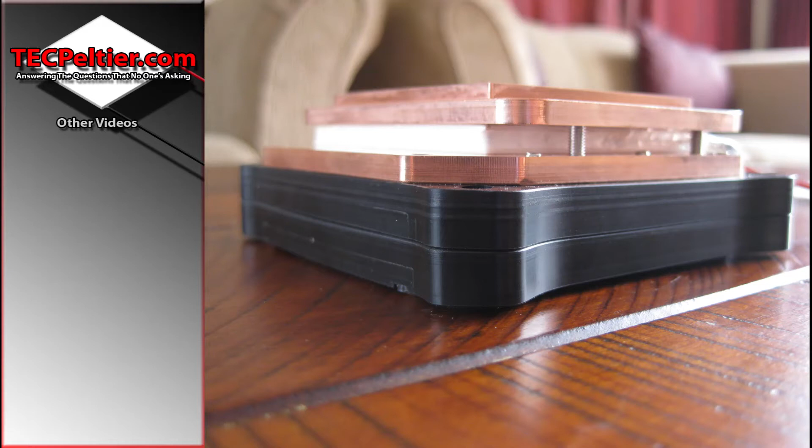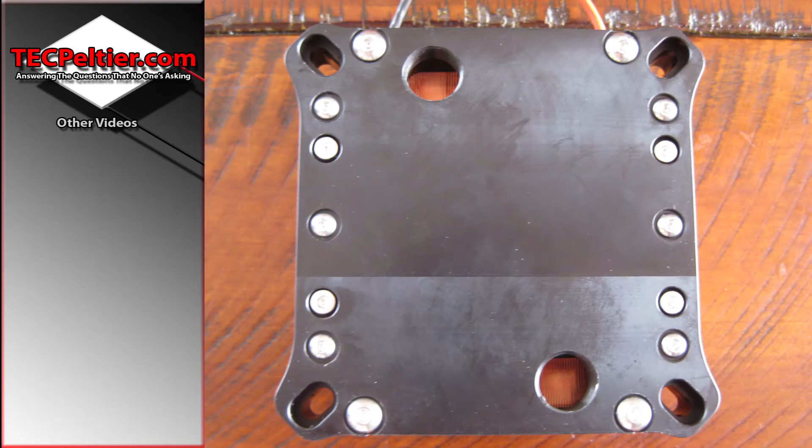Currently I'm working my way through all the water blocks I've made in the past. Now I do recommend that before you watch this movie, I'm not sure I'd really call this a movie, a video, you should probably watch the one prior to it, since we're going to be doing a bit of comparative improvements from the previous one.

So from the last one, this has been improved significantly. One of the ways I did that was to simply make it bigger. It is longer and wider. For cost savings reasons, in the last block I made the water channels, the total width of that, not that much wider than the TEC itself, narrower being cheaper, less copper.

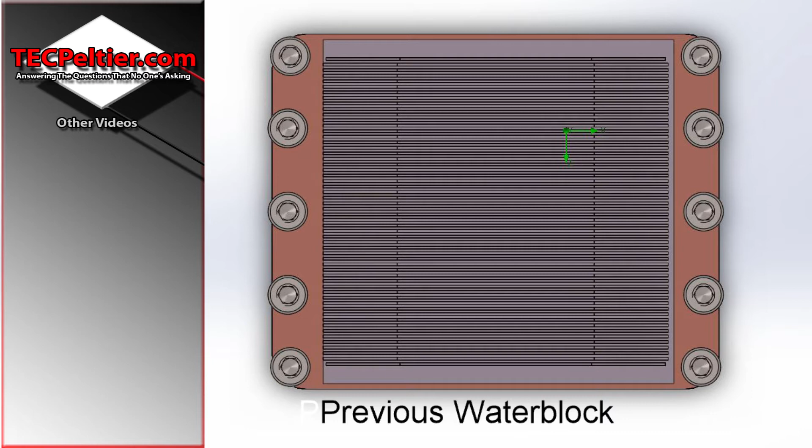But once you add in the space for all the bolts and the space for the seal, the actual slots for doing the cooling were actually not covering the entire TEC. So I made this block much wider, which meant the slots are definitely covering the entire surface of the TEC. And I made the block longer, which enabled me to move the end tanks further away. And this enabled me to mill the slots deeper at the ends of the block.

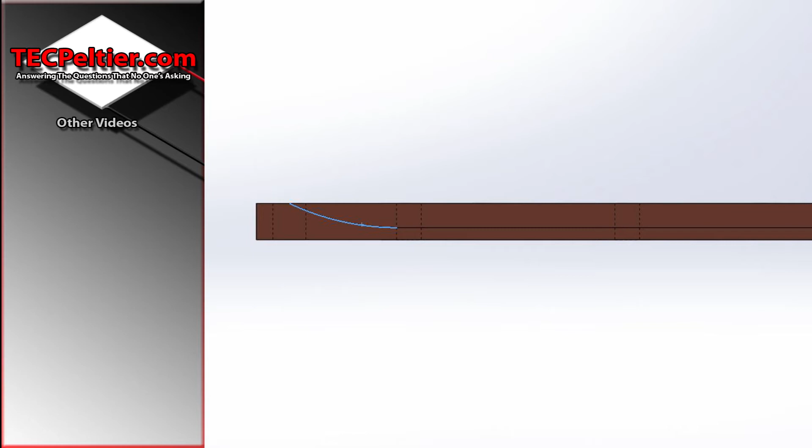This is because it's cut with a slitting saw, and a slitting saw is about 60 mil in diameter. Now, when you try and mill up to a wall, you can't get all the way into the corner because of the curvature of the blade. So as I made the block longer, it's able to mill the full depth further.

Now, some of you might say, why don't you just not have the end and just mill it the entire length of the block? That's definitely possible, but in reality it didn't work for me. If I just didn't have the surrounding thick block of copper, that would have meant that the base of the copper block would have been incredibly thin.

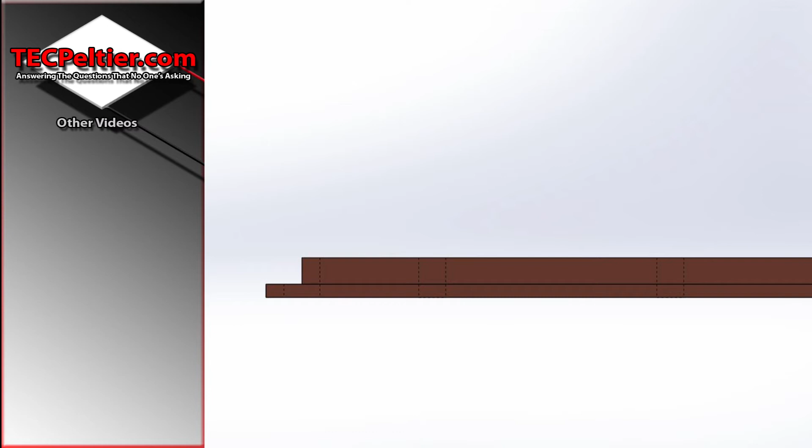Now that is a big problem, because the block is actually, you need to remember, like 80 mil square, quite large. You've got all these retention screws and the rubber seal, and the way it works is you put the seal on the inside and the screws around the outside, and because you're clamping the block outside of the seals, it's actually causing the

block to bow. Now as soon as you mill the outside of the block off, then it's really losing a lot of rigidity, and then your copper block is not perfectly flat, and it has to be perfectly flat to go against your perfectly flat TEC. The other thing is that the end of the block is acting as a support for the fin, and that was part of the problem with this block.

So this has much thinner slots than the previous block, 0.3 slots and 0.3 fins. Now I know it's really hard to see in this picture, but the fins get thinner the further away from the ends of the block, because the end of the block is actually supporting the fins.

Even though the slot is supposed to be 0.3 the entire length, as it gets to the center of the block, it is much wider than that, and the fin is much thinner because the copper kind of bends into the blade. So in potentially my new block, I'm going to work to resolve that, well, make it better.

This also has two covers, and I talk about why I went to two covers in the previous video. But essentially the reason for this is I moved to HDPE from acrylic, because acrylic is actually extremely soft, not rigid at all. Yes, it's brittle, but it's pretty jolly soft when you apply pressure to it, so it would bend. So not very good for ensuring good clamping force so it doesn't leak.

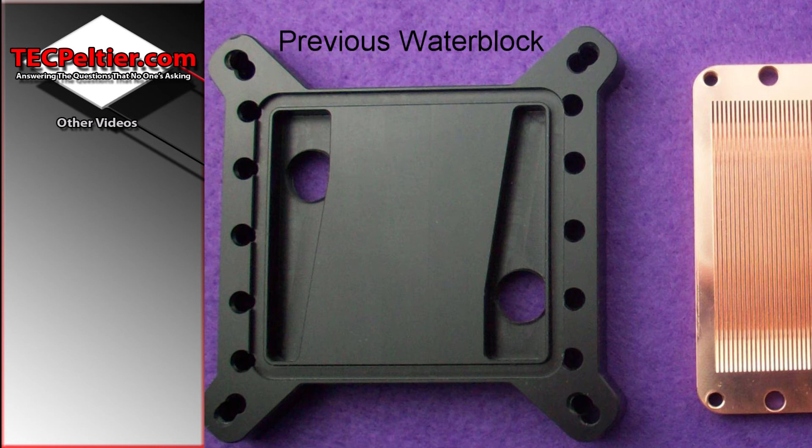So in the previous one I had just one piece of cover plastic where I milled out a pocket or a cup at the end tanks, but unfortunately, because plastic is a stress material, it actually caused the HDPE to bow where I'd milled those pockets out, and that was of course very bad if you're trying to then bolt this to the water block, the copper with the fins, and expect it to stay straight.

So the simplest way to resolve that was to just drill a perfectly symmetrical piece of HDPE. So there is a hole all the way through, and I do everything on my blocks to make them symmetrical to avoid any kind of bowing. And it's important to me. I need to make the best quality blocks that I can, and so attention to detail.

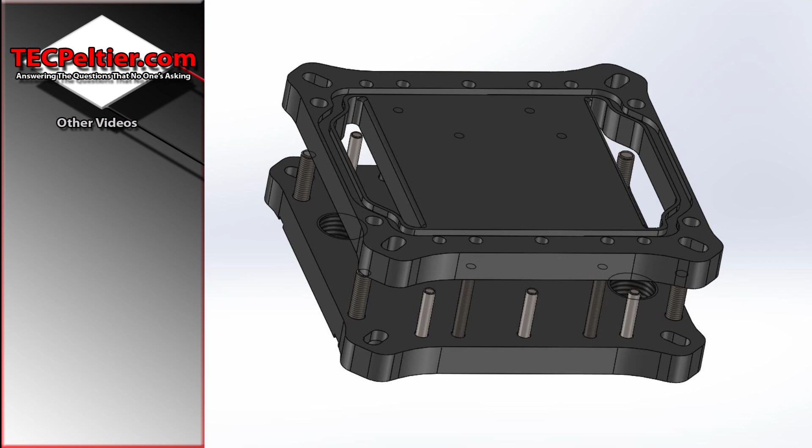So this does have two parts to the top, making it quite a bit higher than the previous block, but it performs a lot better. And I have a few pictures of it in a computer. She's pretty large, but it's not the end of the world, because all you have to do is insulate the cold plate. You don't need to insulate the water block part of this block.

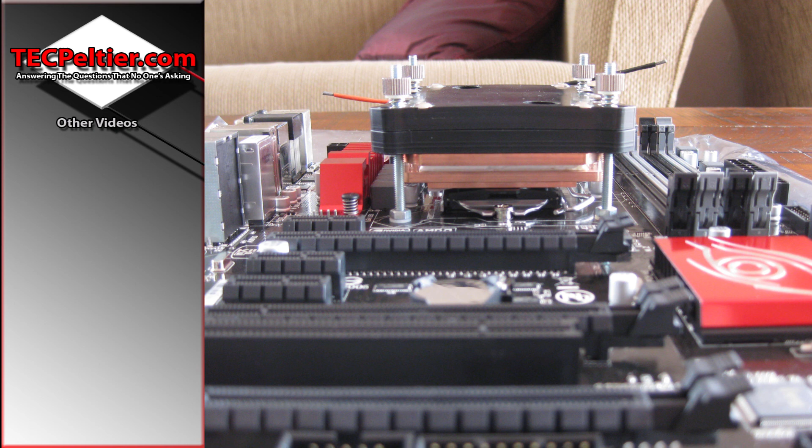So there we go, guys. Hope you enjoyed that. This was a very good block. I really enjoyed it. Hope to make some more.